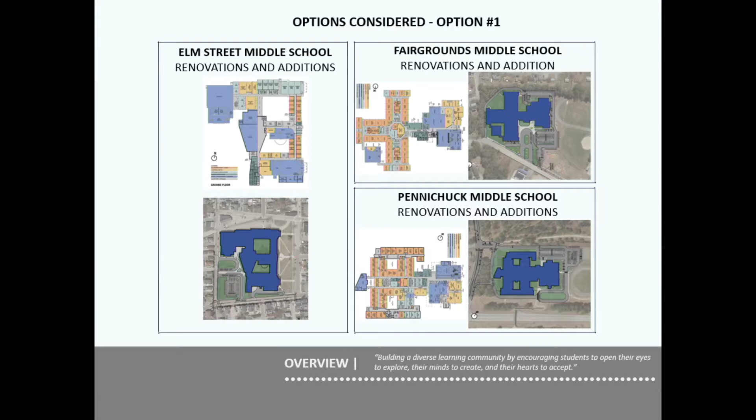That was ultimately chosen by the JSSBC as the site option to go forward with.

If I could interject one thing, when we did the analysis on Elm Street, to renovate that was going to cost in excess of over $20 million more than building a new school. And when we were done, it still wouldn't meet any of the objectives of the middle school program.

Yes, thank you. It was actually designed originally as a high school, not a junior high school or a middle school. So it'd be a challenge to make that particular school into the middle school, which the other two schools already were designed to be.

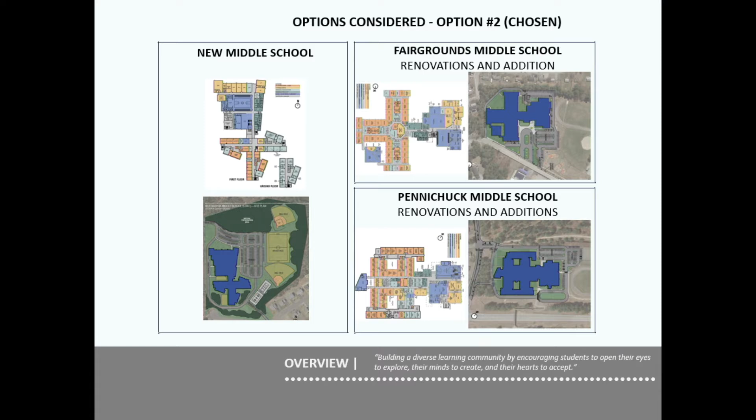So with that being the chosen option, Phase 2 began once the appropriate bonding was voted on. This slide is a little bit out of sorts, but we began the process of design, which I'll show you in the next few slides of where those projects landed.

DD is design development. I'd say it's partly midway there, but not quite. That's really where you're starting to form the project and what it's really going to look like. Construction documents, noted as CD, is a document that the contractor would be able to build from. So the construction documents are the actual documents they build from.

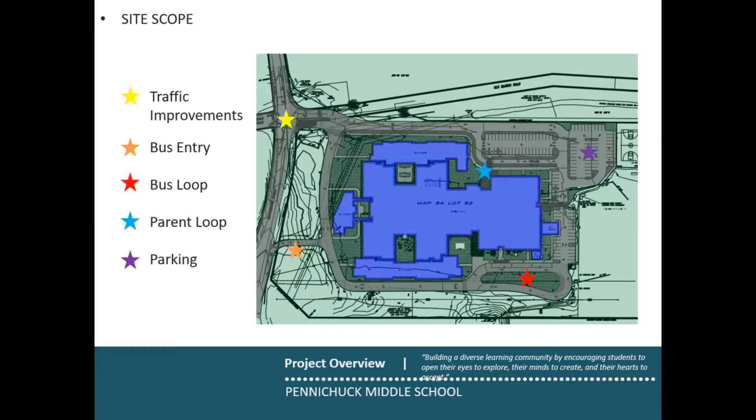On the site, there are traffic improvements ongoing. Right now there's some temporary signal highlighted by the yellow star there. Those will be finalized with final traffic signals once the intersection is completed. There's some additional work, a little widening, adding a turn lane coming onto the site. There's also a new bus entry, also intended for emergency access.

Initially there was only this one entrance into the school, no other entry. So a new bus entry was added and is being used—buses can come from the south right onto the property and around this new bus loop that's been created. There was a bus loop here before, but it's been renovated. In addition, emergency vehicles can utilize that access, so there's not only one access point to the site.

New bus loop: buses from the north come down onto the property and down this loop, a dedicated bus loop. Parent drop-off comes through here, with a queuing lane all the way down the front. They drop off at the blue star and loop back out. There's an on-site traffic signal here—temporary right now, but will be new when the final traffic designs are in place, helping regulate some of the traffic at this intersection on the site. Just one other thing, Jamie.

This is Old Harris Road. We have moved the entrance from up here further back, and it's basically only a road now that services Pennichuck's new solar field. There used to be house lots out there, they bought them all.

In this area, they're moving Pennichuck's fence back, and there's 8 or 10 new utility poles because they have 4 acres of solar panels, and all that electricity is coming back into the grid. Also, before we can widen the street, there's a gas main here, a gas vault, and it's being moved onto Pennichuck land. We've had legal do all the necessary easements.

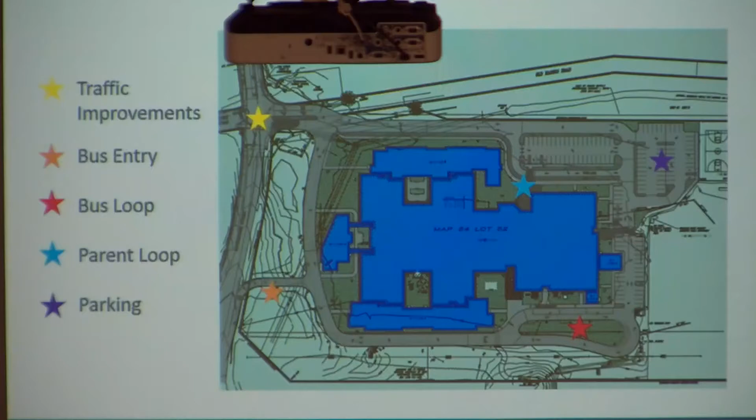Next slide shows the additions and the renovated areas. You can see the green areas are the new additions. The north and south addition are classroom additions. These will house the additional students split from that 1,200 students over at Elm Street School, but also there were 2 modulars on site housing students, and those classrooms, the modulars, I think both have been pulled away at this point.

There's still one, correct? Yeah, one there. One of them has been pulled away for the construction work. Eventually, both will be gone, and the students will be housed in the school. Big security improvement there, because before they're going outside, so that really helps that feature. And the modulars were aging out.

The Learning Commons to the left is the new library Learning Commons area. There's a music and chorus addition off to the right, and a boiler addition with new boilers going in, or have gone in and are running, in the bottom right corner of the school. The Learning Commons is being displaced in the middle, with the existing ones in the middle of the school, with renovations ongoing. All these blue areas are significantly impacted under renovations. There are some other pieces being touched in some of the gray areas, but not widespread.

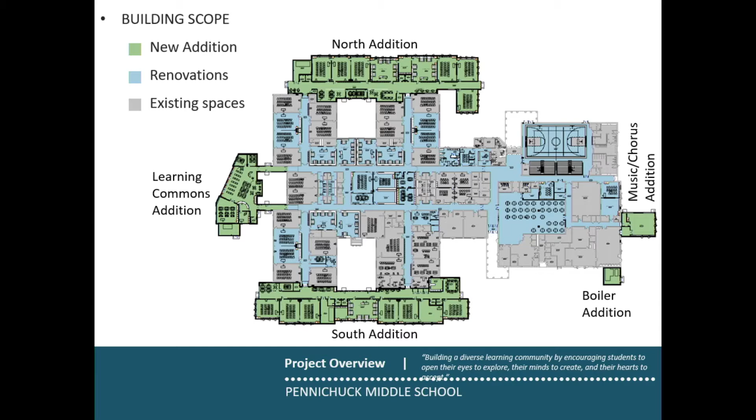All right, anything on Pennichuck anybody has a question about? I know this is very cursory and high level, but I wanted to make sure I presented it. I was just wondering where the entrance is to the school, the main entrance.

Sure, so the existing main entrance is right here. The intersection was over here. You drove in the parent loop, and it comes down, and the main entrance is here. There's also a secondary entrance at this school, which exists already, but that's where the bus students would come into this back entry right here.

Anybody else? We're going to be doing some work on the entry area as well, with some new concrete, because it's in bad shape.

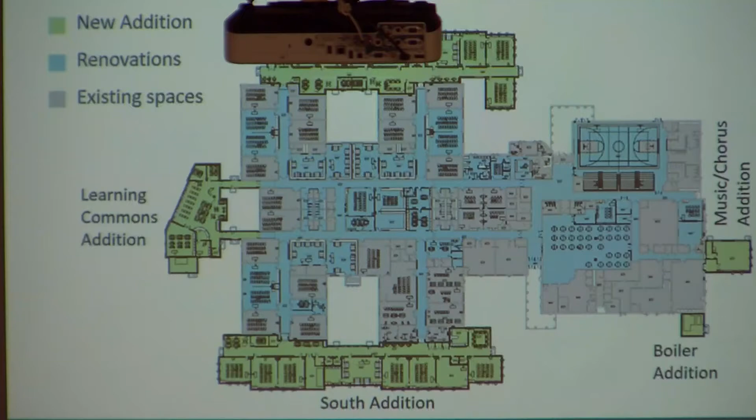I do have one question. Are they going to add solar panels? This is not part of Harriman's scope necessarily. We've been working together with Revision Energy, who is the selected vendor for that. The Fairgrounds got solar across the entire roof. Pennichuck is also getting it, and the new middle school, I believe, is also slated for that.

Yeah, Revision Energy, we sort of got ahead of the game in Fairgrounds with Revision, and we had to move some of the panels after they were put in, so we're not doing the solar panels on Pennichuck till we're done. Oh, okay.

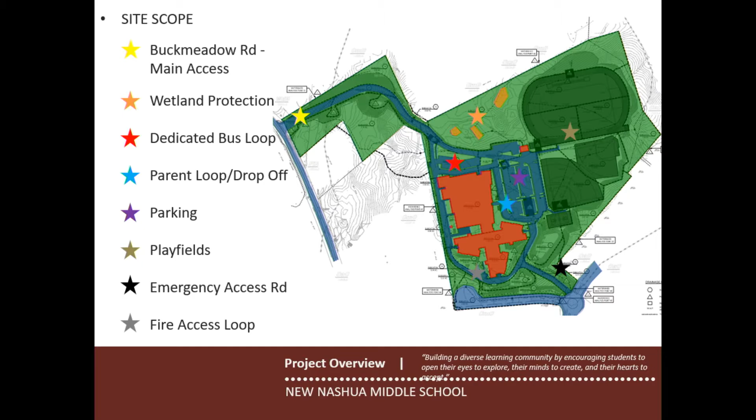All right, moving to the new Nashua Middle School. Again, the school site is down off Buckmeadow Road, which is right here, going up and down, noted by the yellow star. That's the main entry to the school. Cherrywood is just a little snippet here, and this is Medallion Court down this direction. So it's kind of in that corner there.

The original site, as it was started, was in this little green area here. There was some additional land purchases, particularly this one, and then there's a little sliver here that occurred over the course of the design. So again, Buckmeadow is here.

The main entrance will come up and down onto the site. The bus loop is right here where the red star is. They'll be dropping off here, and then entering this entrance, which we'll look at in a moment. The parent loop comes down to this blue star here, which is the main entrance to the school where the secure vestibule is located. There's an assortment of parking lot pieces, parts and pieces inside here, noted by the purple star.

There's a facility building right here that houses athletics and building maintenance storage. In the orange area is a wetland protection area. There are some vernal pools and wetlands being kept back from so they can stay intact. That's noted right here on the north side of the site.

We're partnering with the Conservation Commission, and they're in total, full agreement on the project. There were meetings with them, and we made some alterations to the site layout to make sure we met some of their desired intents, so it was a really nice process.

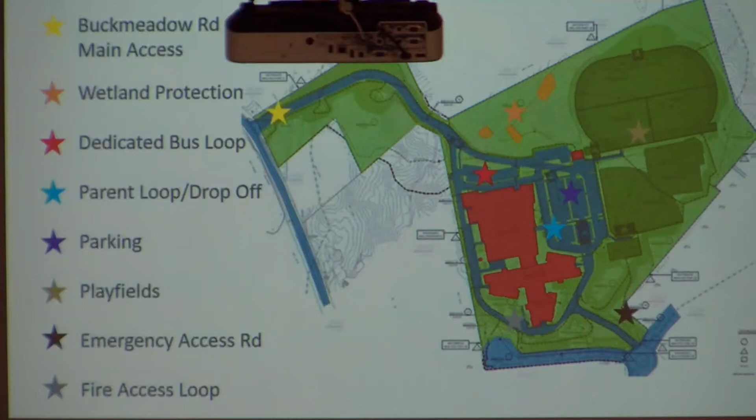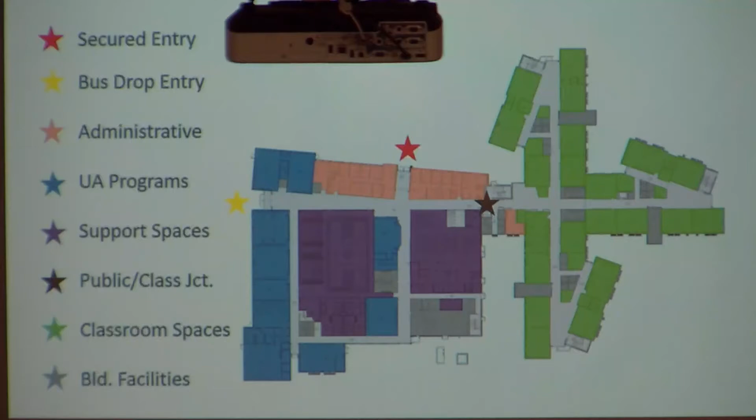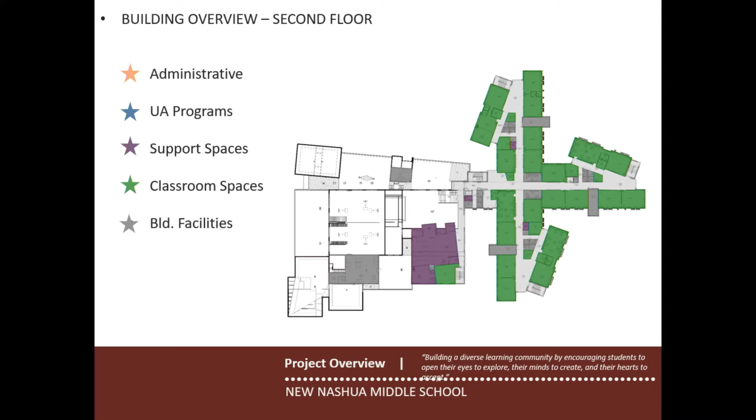Going up 2 floors from there, or the second floor, all this white area really becomes either the view from the floor below or roof areas. So there's no space necessarily that people would be in these white areas. There is some mechanical spaces - you can see there's some right here, and then right here there's some mechanical rooms.

But generally, you come up the community stair or the elevator, and you have a corridor down to the learning commons, which is right here. There's a computer room here. Or you go to the classroom wings that has, again, the assortment of kind of spaces for classroom.

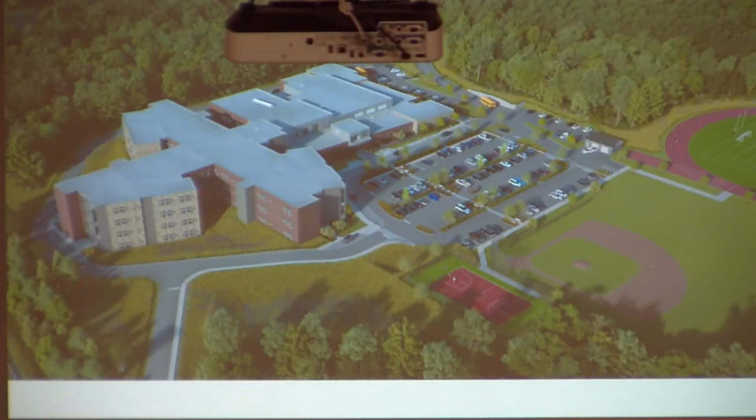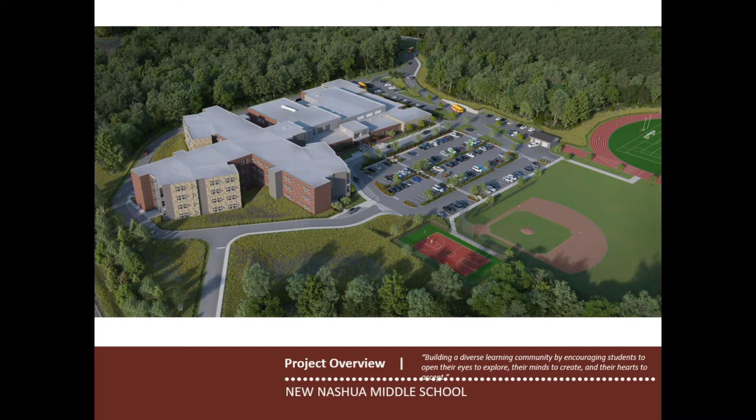So here is a rendering of what the school is intended to look like. If you had a nice clean visualization, it's gonna look almost identical to this when it's completed. You can see the view up to Buckmeadow going that way.

This is the main entry to the school. The bus loop is here. The main entry comes through here and drops off to the main entrance right there. You can see the classroom wings over here, and that lower level. There's 4 levels here, but only 3 levels here, so you can see that drop off.

This is coming down toward Cherrywood. You've got the athletic fields we talked about off to the right, and a little maintenance building right there I was talking about.

This is new for people that were on the board before. We worked on this over the past month or so. It's nice, much more visualization.

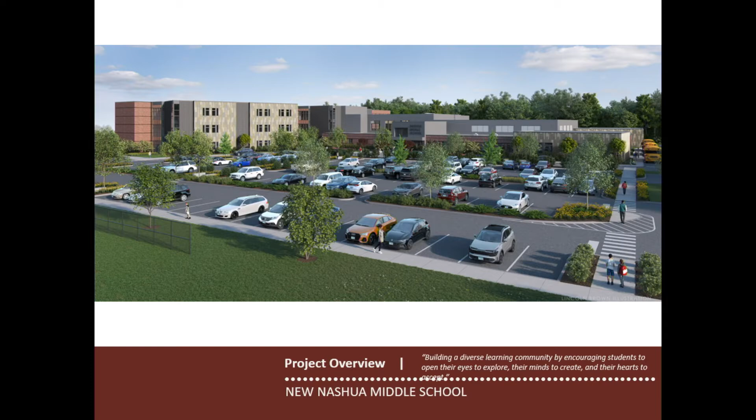Here's standing on the fields, looking back at the main entrance. The main entrance to the school is right there. This classroom is 3-story over here. The gymnasium, high story there, and then the library is back in this little dot here. Notice that there are more than enough parking spaces.

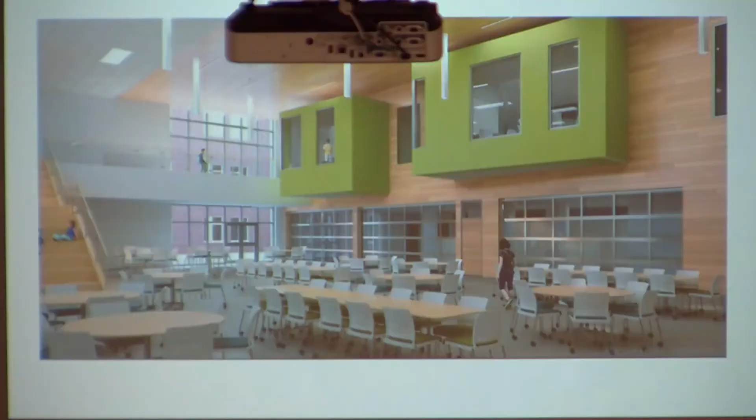You can see the kitchen serving lines will be behind these doors here. Up above, you're seeing the learning commons. These are rooms, some breakout rooms, and this particular one I'm pointing at is a reading area inside the library, almost like a sports box where you're looking down over the cafeteria, but you can also see the stage from here.

My next view, you'll actually be looking back at the stage from up on top of the community stair off to the left. So if you walk up those community stairs and turn around, you're looking back to where we were standing down here, but there's your performance stage, and again those box seats over here.

I often got questions about the sound carrying from the cafeteria into the library area. This wood texture you're seeing here is actually an acoustic treatment called Rulon, an acoustic siding that helps keep the sound deadened inside that space. The glass that's here is also insulated glass, and the walls have a high STC, sound transmission class, to help buffer that — a very good rating on this wall.

In addition to the general sound going through the wall, the rating of that Rulon system helps deaden the sound so that space doesn't sound like a real loud space.

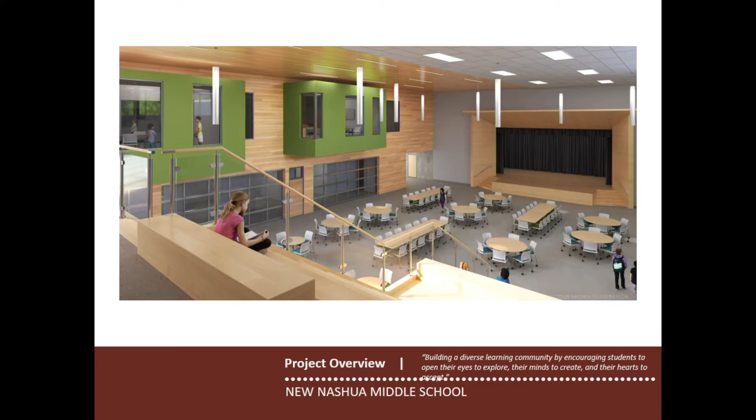You walk all the way down, through the separation between the public area and the classroom side, all the way to the end. If you went to one of these wings, you're standing right here looking into this collaboration area, right here in this next slide.

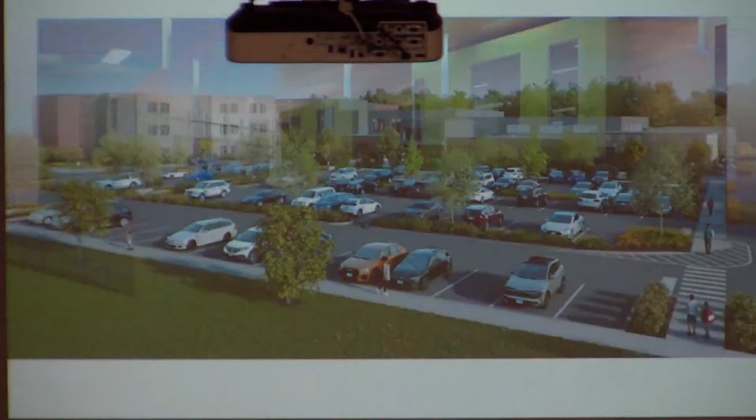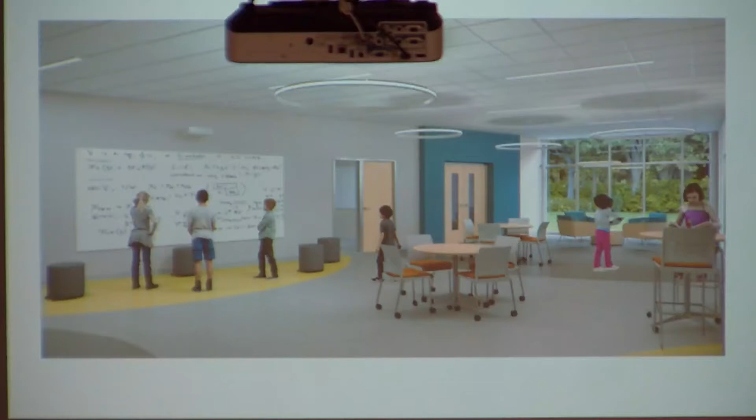So now you're looking at the glass at the end. Students are collaborating inside this space. This is a stairwell going down to all the floors. There's a classroom to the left, classrooms to the right. Where this student is sitting here, there would be a TV like we had at Fairgrounds, I mentioned earlier, where the fireplace is going, that sort of thing.

If you walk a little further and turn around, you're looking back down the corridor you just came from, but there are also these community little groups like we mentioned at Fairgrounds, where students can go and work with teachers, or teachers can work together and collaborate, kind of having more of a project-based meeting inside of these.

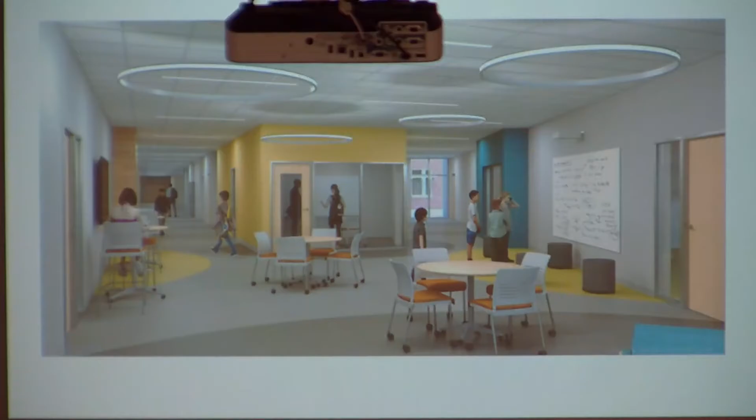All right, any questions on the new middle school? Questions, Alderman Klee?

Thank you, Mr. Chairman. Refresh my memory, these glass walls and so on, can you see in from the outside of those? Are you talking about these ones right here? No — if you go to the one you were showing with the — right here? This one here, yes, that one there.

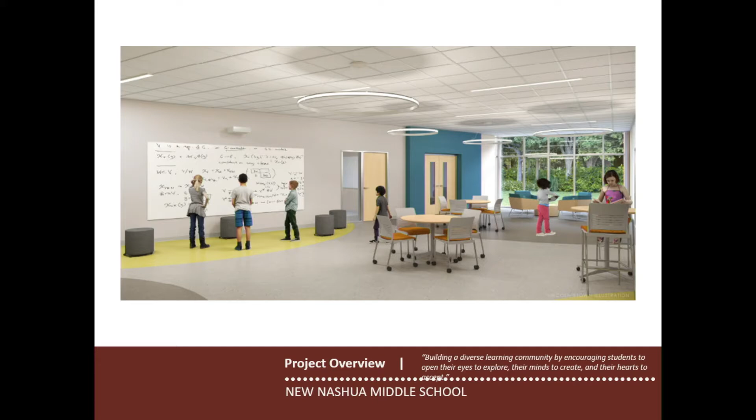Yeah, mostly yes, you can. The glass is treated with a low E coating. It helps with the glare coming off it, so it will actually give you an appearance that it's not totally transmittance visually through that. But yes, you can see through them.

May I follow up, Mr. Chairman? Follow up? Yes.

The only reason I'm asking is I was just recently at St. Joseph Hospital, and I noticed when I walked into the entranceway, they have all this glass that you can see out from inside, but you can't see in. Given that we continue to think about the safety of the children, I didn't know if we had thought about anything like that. Those discussions can go really deep. There's two sides to that, and I would defer some of this to Nashua's Safety and Security Director, but being able to see in and out is sometimes as important as not seeing into some spaces. I think police and fire prefer that they can be seen in.

Okay, thank you, that answers my question. Thank you.

Yes, Gloria? It's just a comment - the futuristic look of those lights, are they lights or what are they? They're lights, they're LED. Lights in the building are LEDs. The entire building will be energy efficient.

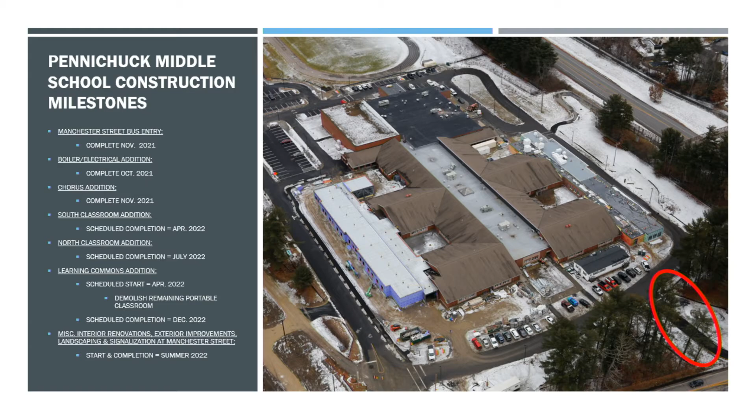Manchester Street, that's the new bus entry off Manchester Street. That's been completed and temporarily paved. We'll be completing the final tie-in this summer when school lets out, so that'll all be wrapped up by the time school starts next September.

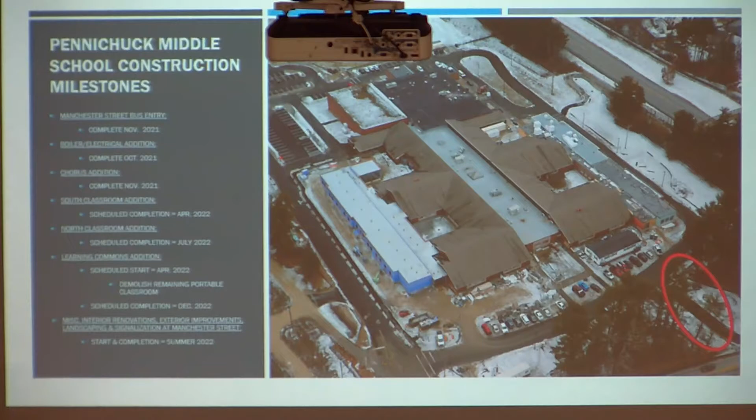Moving along, back from this view, that's the boiler room addition that was completed in October. I'll get into the details for each of these additions, but I just want to show everybody where each is situated on the site.

The next is the chorus addition that was completed in November 2021. The students have since moved out of the old chorus space and into the new. I'll show some photos of the completed areas as we go through in more detail.

Next is the south classroom addition, just along the new bus loop. That's moving along very well. We actually started painting this week, so hopefully we'll be able to do some tours coming up and you'll be able to see the progress that's been made.

North classroom addition, we're loaded. We got all the roofing material on site today, which is a good sign, so we'll get that just in time for the snow. I'll be showing some progress photos there as well.

And the Learning Commons, Jamie mentioned there is one remaining modular classroom that will be demolished during school vacation in April. The original one just to the north, that Carl was pointing to, was demolished last summer. Once the modular is demolished, those two teachers will move into the brand new classrooms for their permanent home in the south addition, and then we'll be able to start construction of the new Learning Commons that Jamie showed you earlier, scheduled to be complete at the end of December this year.

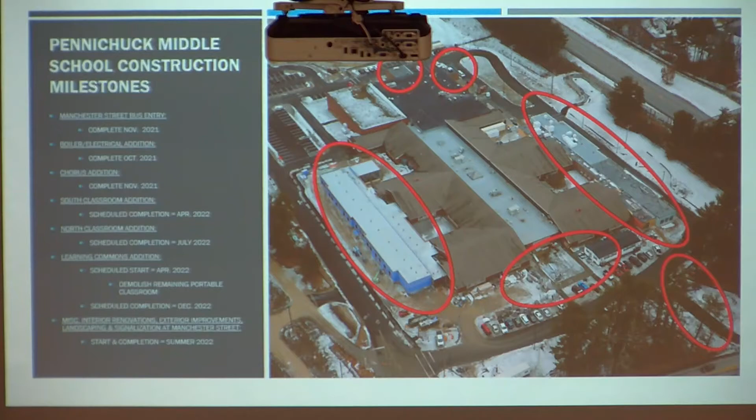Next summer will bring all the various site improvements, final plantings, landscaping, and final signalization and lighting that you were just mentioning before. That'll all take place this summer, and we'll be ready at the end of the summer when the students return.

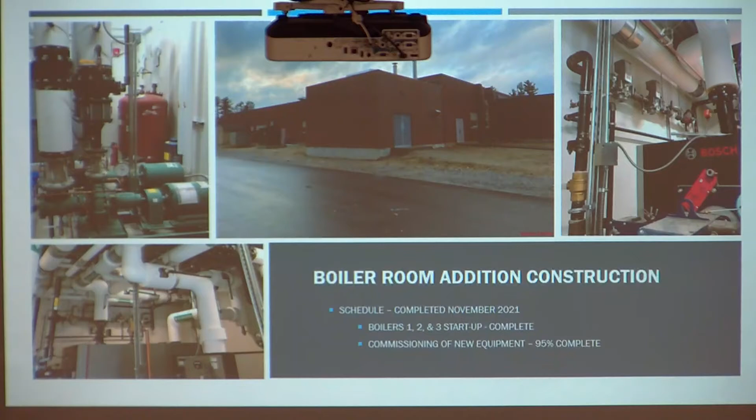Getting into the additions in more detail, this is the new boiler room, completed in November 2021. It includes three brand new boilers. Boilers 1 and 2 are the main life of the building, and boiler 3 is a condensing boiler, kind of an autopilot boiler used in the warmer months so we don't have to run the others. It's more of an energy efficient system as part of Harriman's design.

Commissioning of the new equipment is about 95% complete. Since we aren't done renovating the existing building, we're kind of chasing temperatures around the building, making sure students and teachers are comfortable during the day.

Moving into the chorus addition, as I stated earlier, this was completed in early November 2021. All the exterior brick veneer and windows are complete. The interior finishes, marker boards, and writable surfaces are all complete. Harriman has performed all their inspections and punch list.

Punch list is basically when Harriman and Harvey go through the space and generate a list of items to make sure we built it to meet the specifications of the project, then we issue that to our subcontractors and make sure the space is turned over as it should be.

That's all been completed for this area, and as I stated earlier, they moved out of their original space. Now we're renovating the existing music and keyboard space, which will be turned into a health and keyboard space. We'll be turning that over in about 2 or 3 weeks.

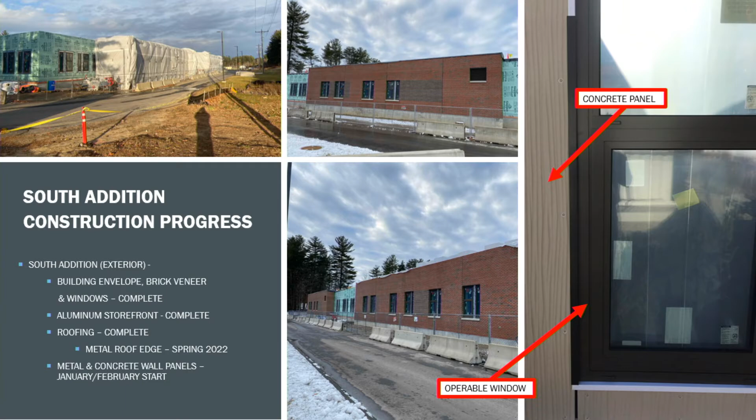Priming and painting will be complete at the end of this week. Installation of all the fin tube radiation, that's all the heating elements underneath the windows, that is all complete as well. And as I just mentioned, the ceiling installation is in progress right now.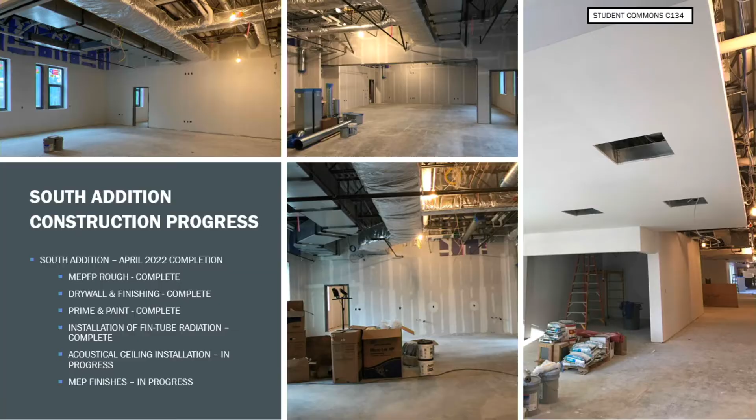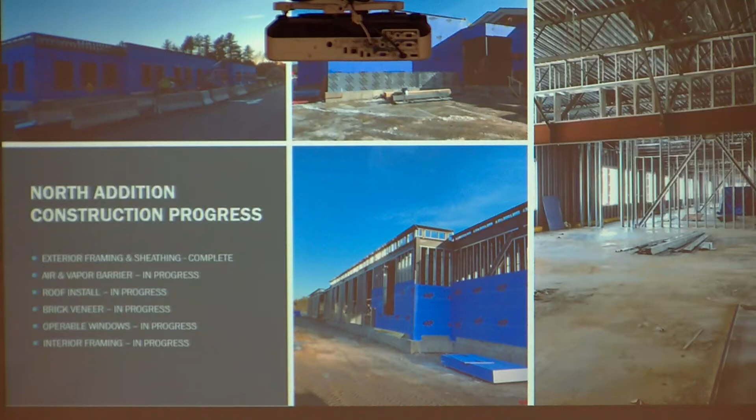All the air and vapor barrier work is in progress. That's a temperature-dependent construction activity, so with the cold temperatures we have to build a tent around it and heat it to be able to do the work. We're in progress of doing that now, and we'll be setting up tents next week. Looks like we have some warmer weather coming, relatively speaking, and that's why we want to get the roof on so it doesn't rain inside. Happy superintendent, happy life.

The brick veneer is in progress, as I mentioned. We'll be building tents to allow us to continue the masonry work in these cold temperatures. All the operable windows are in progress, and interior framing is about 90% complete, as you can see. I couldn't find a clean area to take a photo, but we're roughly 95% complete on interior framing today. So we're moving along very well on the north addition, and I think you guys will be really happy with the results. Any questions on the Pennichuck construction progress?

Ms. Timmons: Yes, I have one question. Is that a second level? Is that the classroom area? If you go back a slide? Response: No, it's all single story for the new additions. Ms. Timmons: Oh, it looked like 2 levels, but it's not, huh? Oh, okay, that's one question I have. Thank you.

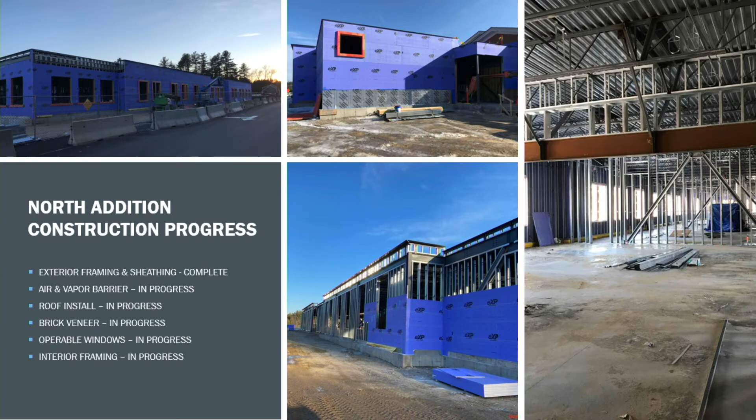Any other questions for Harvey? Ken? Okay.

Let's go. So, you want to get into the PCO, PCCOs? Sure, so the next portion of the packet I'll bring you guys through, and I'll explain it to the new committee members and give a refresher for everybody else. There are a few acronyms that we use in construction.

Two of them: there's a PCO, which is a potential change order. This is generated whether from a question we ask, something unclear, a client development thing, or a code official enforcement item. Those go to Harriman, who will issue a directive for Harvey to price. We'll request pricing from all of our subcontractors, review it internally, and package that into what's called a potential change order, which we present to this group. With approval from the group, we can give our contractors permission to perform the work and go from there.

Once we have a group of PCOs approved, I usually try to do it about once every month, we compile those approved potential change orders into what's called a PCCO, a prime contract change order. That's a formal document that allows us to alter the overall contract value of the project, whether it's an increase or a decrease. Keep in mind a PCCO is comprised of previously approved items by the committee, so anything I put together in a PCCO has already been presented to and approved by the committee.